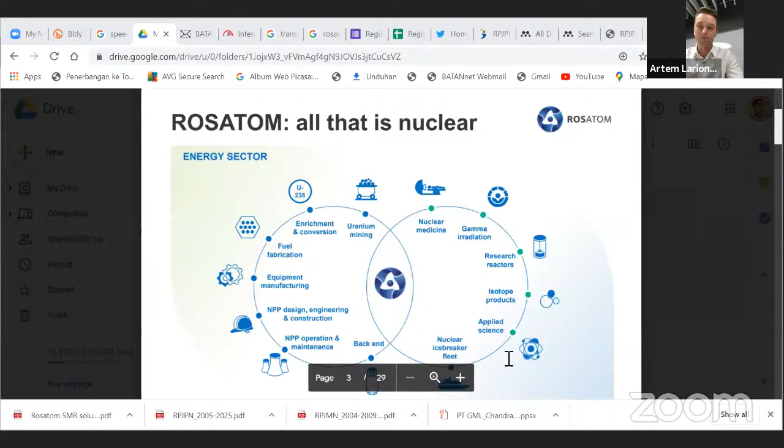Why are SMRs so important to us? On the one hand, the global energy market has changed dramatically over recent years. Smart grids are developing, energy system decentralization is required, and renewable energy sources now make a great impact. We see a trend toward decarbonization globally, and a transition to projects with low capital intensity.

On the other hand, we at Rosatom have great expertise in large-scale NPP construction around the globe - more than 100 Russian-designed NPP units have been constructed globally. What's more, we have wide experience in small reactor technology development for the icebreaker fleet. So we develop our new products, particularly SMRs, as an effective small capacity energy solution to correspond to these new market requirements and needs.

OKBM Afrikantov is a subsidiary of Rosatom and is the chief designer of small reactors for marine applications. Since 1954, OKBM has designed and manufactured over 20 small reactors for civil marine applications, and we have accumulated great expertise in operation of small reactors for the icebreaker fleet, over 400 reactor years.

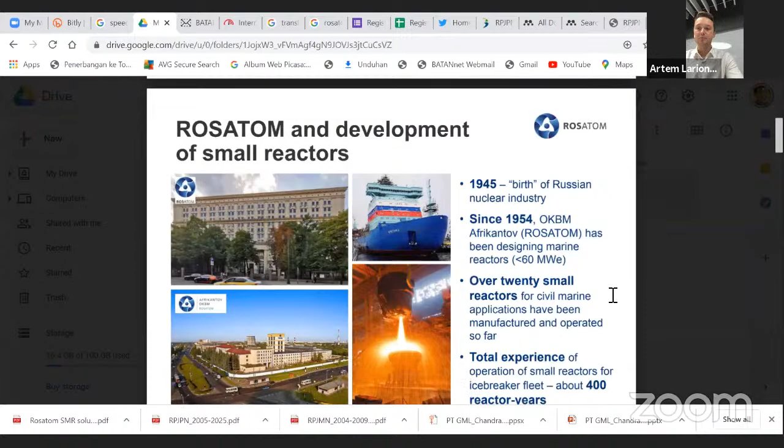We now have 4 nuclear icebreakers and 1 nuclear lighter aboard ship carrier in operation. Rosatom is renewing its icebreaker fleet, and we are developing 2 classes that will be more powerful than the existing ones. These classes will be based on a new generation of SMRs of the Ritm series.

6 Ritm series reactors have been manufactured and installed on universal icebreakers Arktika, Sibir, and Ural. These icebreakers will have variable draught and will be able to navigate both shallow rivers and deep seas in the north. In November 2019, 2 Ritm series SMRs attained criticality, so we can say these reactors are fully referenced. After entering service this year, this icebreaker will become the most powerful icebreaker in the world, able to break through ice up to 3 meters thick.

Icebreakers Sibir and Ural, also with Ritm series SMRs, will enter operation in 2021 and 2022 respectively. 2 more icebreakers of this kind have been contracted.

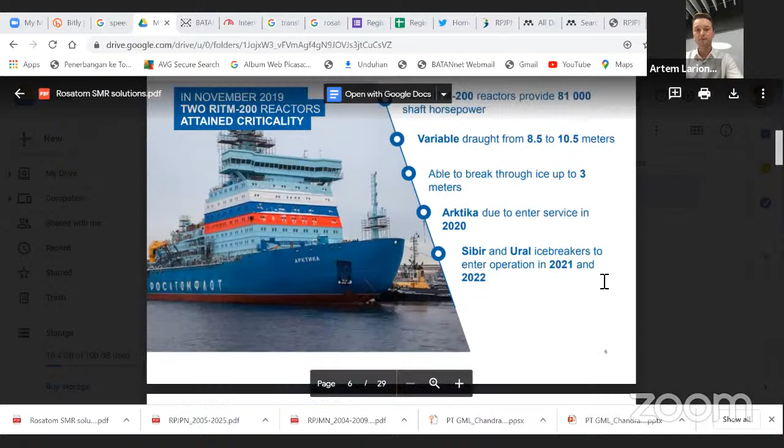Russia pays great attention to the development of the Northern Sea Route, a shorter connection between Europe and Asia, and the Arctic region in general. The amount of time each year that this route is clear of ice and can be passed by ships is increasing due to global warming.

In March 2020, the Russian president signed a strategy document outlining Russia's intentions in the Arctic region for the next 15 years. It includes measures to improve the socio-economic situation in the communities, as well as further promotion of the development of the Northern Sea Route. It is our national priority to reach at least 80 million tons of annual goods traffic by 2024, and 120 million tons by 2030 - we plan to increase it ninefold.

To reach this target, Rosatom is already developing the new generation of icebreakers. They are called Leader, with Ritm-400 reactors, that will ensure year-round navigation by 2030.

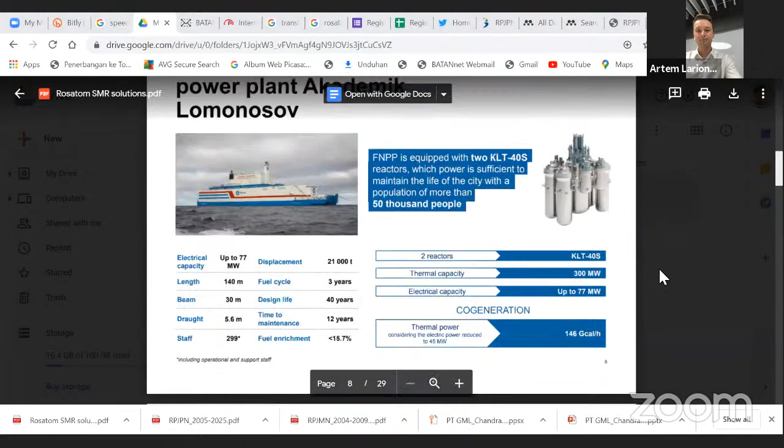Based on that vast experience of design, manufacturing, and operation of small reactors for the icebreaker fleet, we developed the world's only floating nuclear power plant, Akademik Lomonosov, named after the prominent Russian scientist.

It is equipped with two KLT-40S pressurized water reactors that can generate up to 77 megawatts of electricity, or up to 300 megawatts of thermal energy. This may be quite enough to provide a large industrial facility or a small town with a population of more than 50,000 people. These reactors are quite similar to those used on icebreakers, so this is a tested solution, designed by Russian nuclear scientists and naval architects.

Well, the vessel—so I don't see the slide. Okay, this is it. The vessel itself is 140 meters long and 30 meters wide, and has a displacement of 21,000 tons.

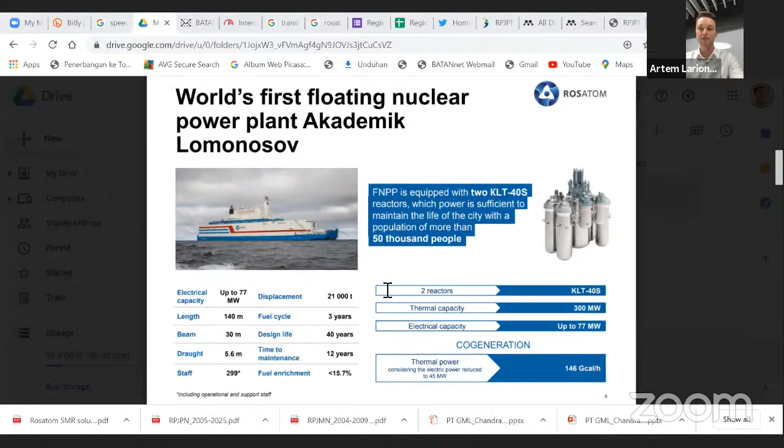One of the biggest challenges for our Russian scientists was the need to maximize the period of permanent work on site without interruptions for fuel reloading and maintenance. The achievement of FNPP Akademik Lomonosov is its own fuel storage on board and refueling system, which allows it, in fact, to reload itself. Due to this, the fuel cycle is extended to 3 years, and the maintenance period is once in a 10 to 12-year time.

After a 10 or 12-year period, it has to be transported to the shipyard and maintained. This procedure lasts for about 1 year. So the total lifetime of the FNPP is 40 years, with possible extension.

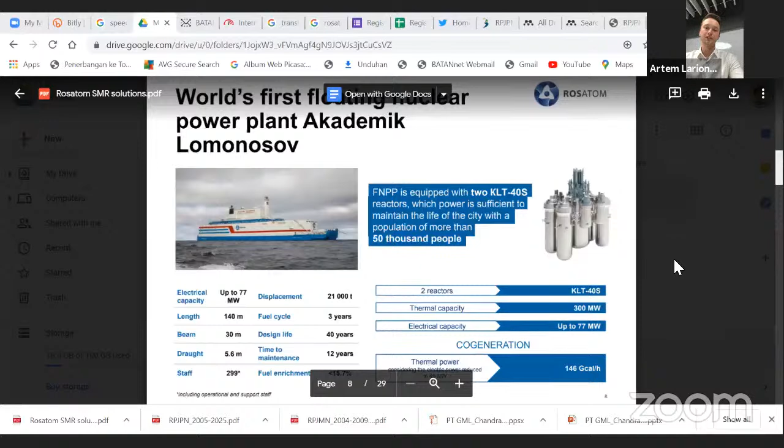Next slide, please. Now a few words about the status of the project.

In April 2019, comprehensive testing of the reactors was finished. In June 2019, the operator of FNPP, Rosenergoatom—a subsidiary of Rosatom that operates all nuclear power plants in Russia—was granted an operation license by Rostechnadzor, our regulator.

In September 2019, the FNPP was successfully transported from Murmansk to Pevek, covering more than 4,700 kilometers. In December 2019, it was connected to the grid and started supplying electricity. In January 2020, it delivered the first 10 million kilowatt-hours of electricity to the Chukotka grid. Finally, in May 2020, it was fully commissioned and started supplying heat to Pevek city.

Next slide, please. Basically, the FNPP consists of the floating power unit itself—the vessel—a special pier, and the coastal sites of the FNPP. Let me start with the coastal site.

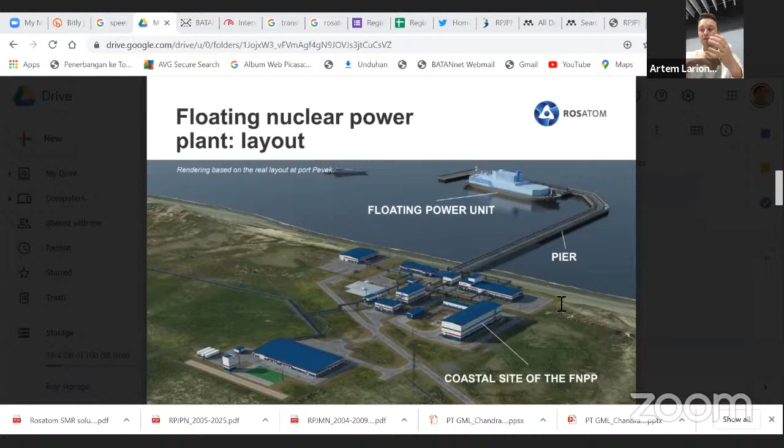The complex of hydraulic structures includes a special pier with devices for unfastening, and an underwater pit that creates the necessary conditions for the operation of the cooling systems. The pier protects the floating power unit from ice drift and waves. Dams and breakwaters have been installed, making colliding with icebergs practically impossible, and the coastal infrastructure prevents any possible impact against the shore or the seafloor. The FNPP is located in a bay that ensures additional protection.

Next slide, please. The floating power unit itself is a non-self-propelled barge, and it has to be towed to the site of operation. It is 140 meters long, 30 meters wide, and has a displacement of 21,000 tons.

The barge is divided into three main parts. The central part is the reactor compartment, housing two KLT-40S reactors, spent nuclear fuel, and solid radioactive waste storage and handling equipment. Above, there are two steam turbines that process thermal energy into electrical power, and in the aft part, respectively, control systems and the compartment unit, as well as the residential unit.

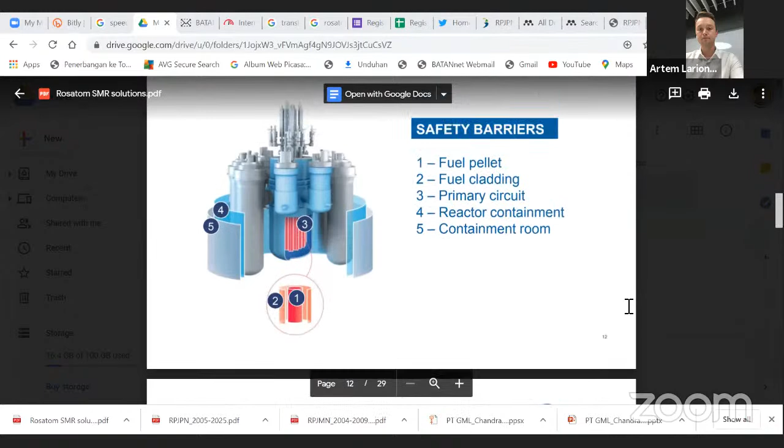Next slide, please. Safety issues were put as an absolute priority for us when designing the floating power plant. All Russian and international safety standards were observed when designing the Akademik Lomonosov FNPP.

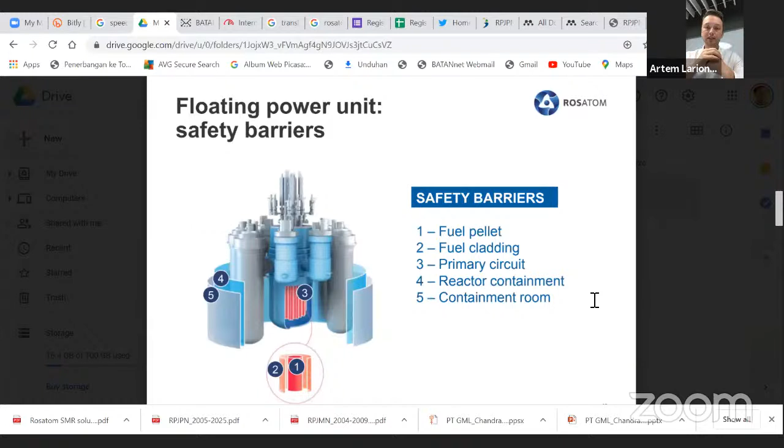The stress tests conducted after the Fukushima accident confirmed the high resistance of the FNPP to severe accidents, including tsunamis, wind loads, and other hazards. Safety is ensured by a combination of active and passive systems, inherent safety features, and the defense-in-depth principle. There are 5 safety barriers, including the fuel pellet, fuel cladding, primary circuit, reactor containment, and containment room—a system of cabins with individual ventilation.

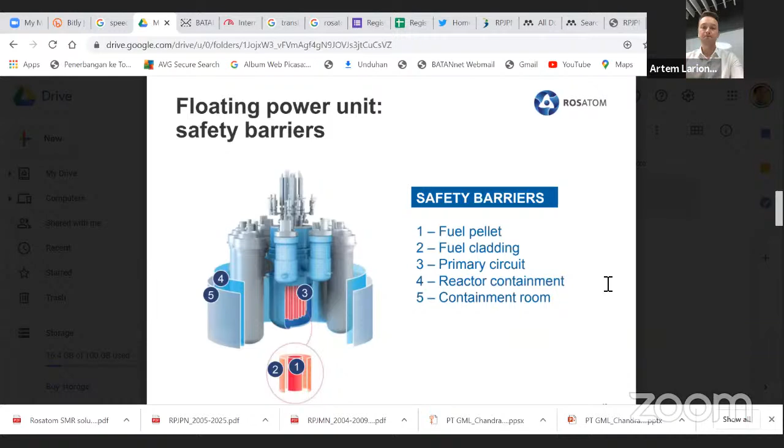The floating power plant has multi-level protection systems from external effects, including a double hull structure. The security system excludes any possibility of terrorist attack or sabotage, either from the sea or from the ground. Next slide, please.

The FNPP staff includes operating personnel and support staff. Overall, there are about 300 people. Operating personnel include 2 rotation shifts that swap every 1 or 1.5 months. Support staff consists of physical security personnel, firefighters, and administrative personnel.

Rosatom provides comfortable working conditions for FNPP personnel. For instance, living and meal expenses, as well as transport costs, are covered by Rosatom. 42 years is the average age of FNPP staff.

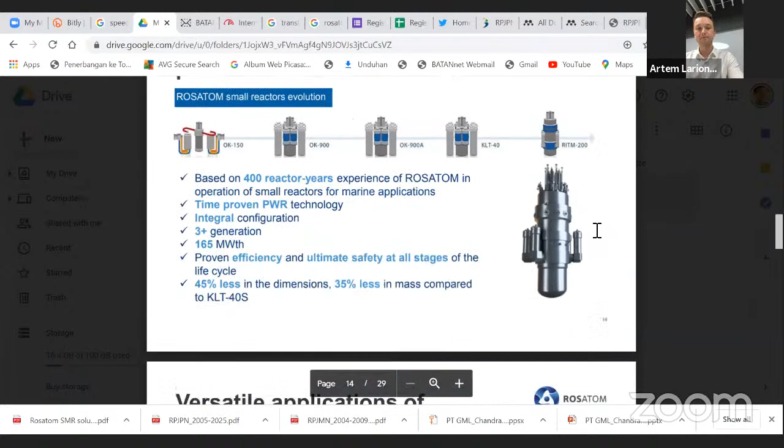Rosatom is now ready to offer its potential customers SMR solutions based on state-of-the-art RITM series SMRs, incorporating all the best features from their predecessors, KLT-40 ship reactors. Our RITM series SMR is based on time-proven pressurized water reactor technology and 400 reactor years of experience in operation of small reactors. The technology has proven its efficiency and ultimate safety throughout all stages of the life cycle.

Innovative features like integral configuration have made it possible to reduce the dimensions of the reactor by 45%, and the mass by 35% compared to the KLT-40S reactor. Such design almost eliminates the classic large-scale loss of coolant accident. 6 RITM series SMRs have already been manufactured, and 2 of them attained criticality in 2019, so we can say that RITM series SMRs are a tested and reference solution.

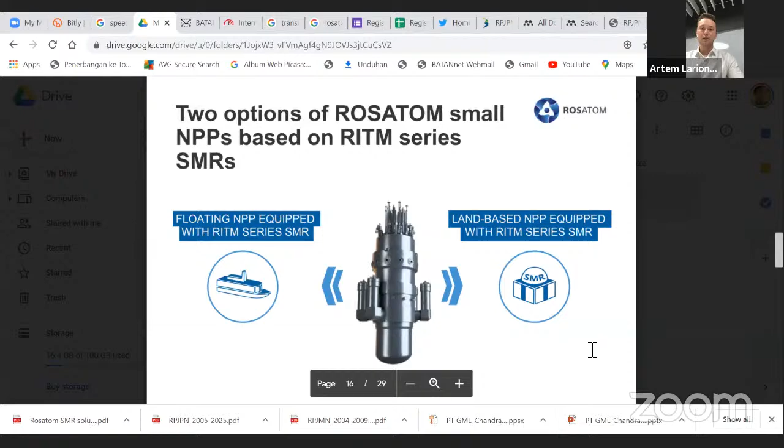FNPPs can be considered for a wide range of potential sites, including islands, archipelagos, offshore facilities, various mining and mineral processing facilities, both in the north and in the south. They could bridge transition times in regions undergoing structural changes, and these power plants could cover short-term energy requirements, for example in large construction projects or offshore drilling. So multi-purpose application is possible.

FNPP can provide electricity, heat, or desalinated water. This is a perfect solution for offshore facilities and a wide range of potential sites as well.

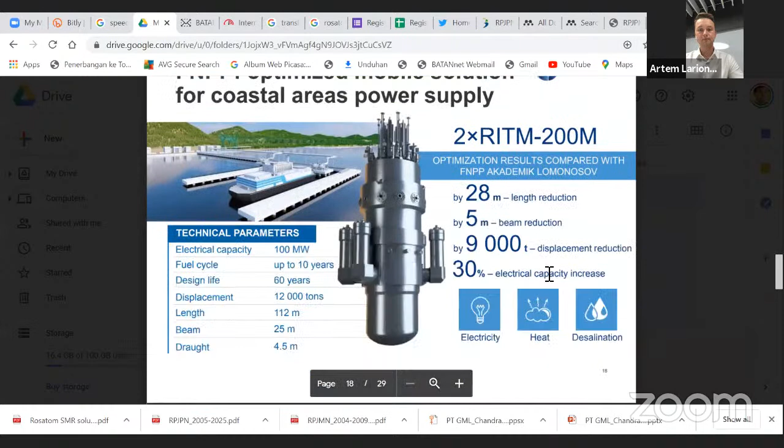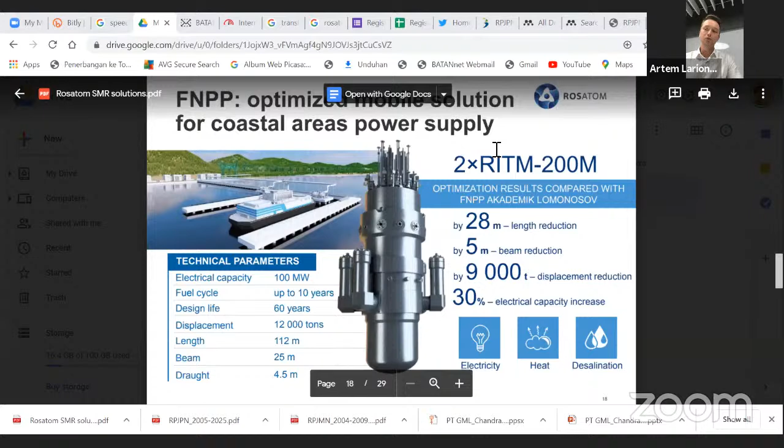Following the success of FNPP Akademik Lomonosov, we are now developing an optimized version of the floating nuclear power plant, based on RITM-200M reactors, each of 50 megawatts. Compared with Akademik Lomonosov, it will be more compact, more powerful, and more efficient. The electrical capacity will be increased from 77 megawatts to 100 megawatts, the fuel cycle from 3 years to 10 years, and the design life from 40 years to 60 years, with possible future extension.

The maintenance period is the same as the fuel cycle, 10 years, so once every 10 years there's a maintenance period and fuel unloading as well. We plan to complete the concept design stage by the end of this year, and the first of a kind of this energy solution is planned for 2027 or 2028.

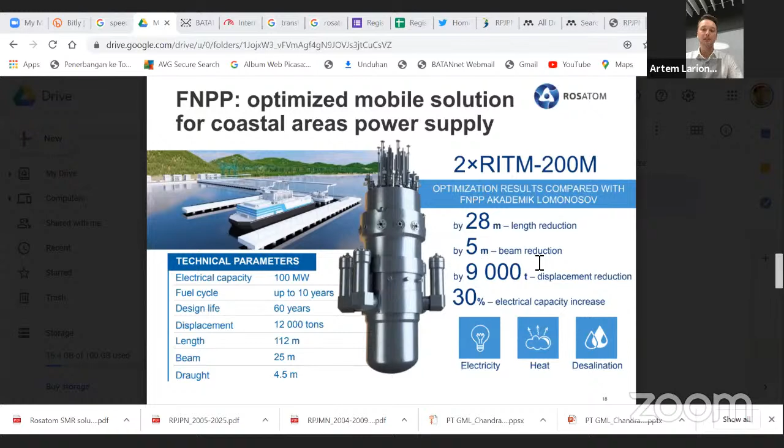FNPPs combine all the traditional advantages of nuclear power, including continuous baseload energy supply, effective cost management, zero CO2 emissions, and multi-purpose application, with something to offer on top of that: a short period of construction works on site, no decommissioning on site, a long fuel campaign up to 10 years, and flexible lifetime period.

What makes FNPPs unique is that they are built from start to finish in shipyards, using the same expert construction technology as on nuclear icebreakers and Navy ships. There can be mass production of FNPPs, and therefore more efficient construction can be achieved than is currently possible with conventional large-scale nuclear power plants.

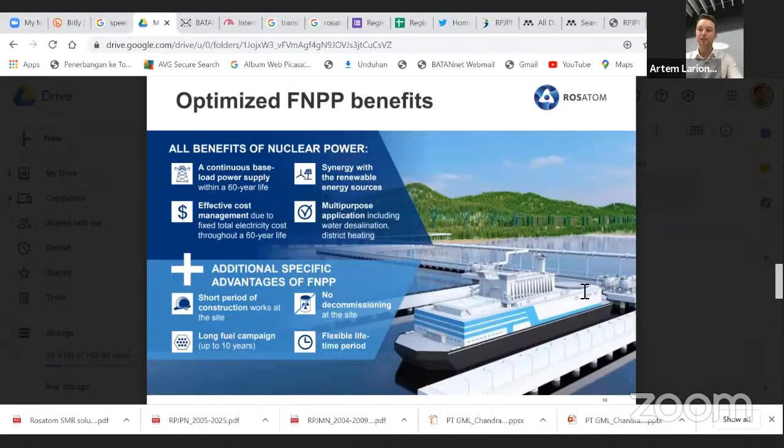In addition to cost savings resulting from the assembly line efficiencies of a shipyard, FNPPs are very, very flexible and can be transported to another site.

Experience of Akademik Lomonosov, as well as all Russian and international safety standards, were considered when designing the FNPP. The safety is ensured by a combination of active and passive systems, inherent safety features, and the defense-in-depth principle. These systems eliminate as many potential risks as possible, reduce the likelihood of accidents, and ensure that if an accident does occur, the consequences are minimal.

The safety of the FNPP against external effects is provided by specific conditions of the site, and the choice of the potential site is very important to ensure natural protection of the FNPP, along with hydraulic structures including a special pier and other features, and of course the design of the vessel and the reactor.

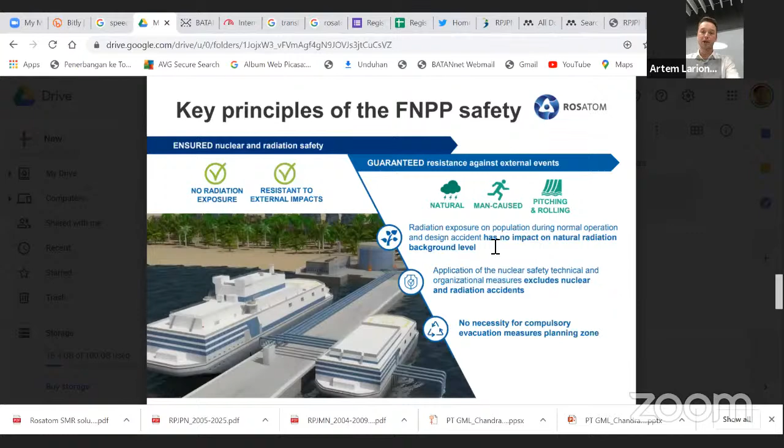Now let me give you more details about our land-based solution.

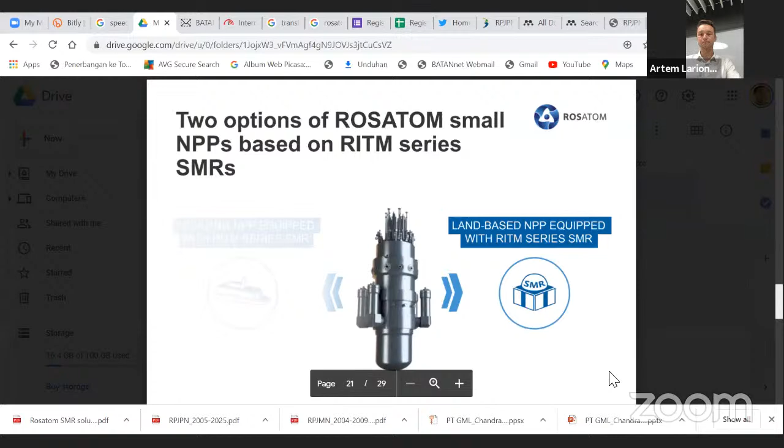So we are developing the land-based SMR and PP as well. It is equipped with RITM 200N reactors with an installed capacity of 106 megawatt. It has a design lifetime of 60 years and refueling cycle is up to 6 years. So the capacity factor will exceed 90% during the whole 60-year design lifetime, making it a really reliable electric generation system. Speaking about the construction time, we plan to reach about 4 years for first of a kind, and we plan to decrease it to 3 years for next generation.

So RITM series reactors can be used for multi-purpose applications, including electric power generation, water desalination, district heating, and due to its relatively small installed capacity and maneuverability characteristics, Rosatom NPP has better compatibility with electrical grid infrastructure.

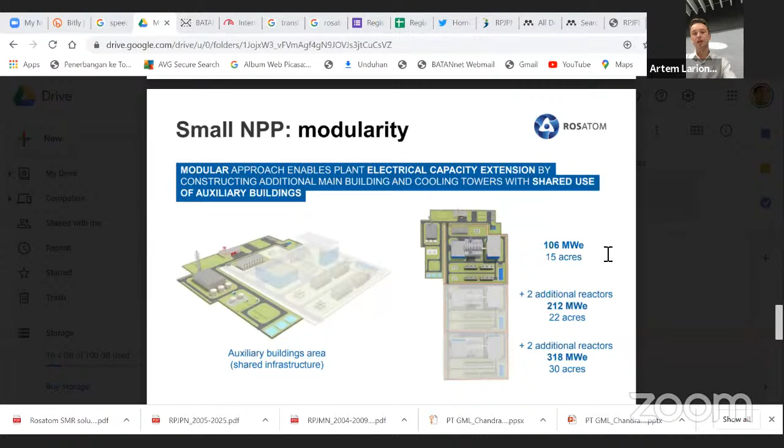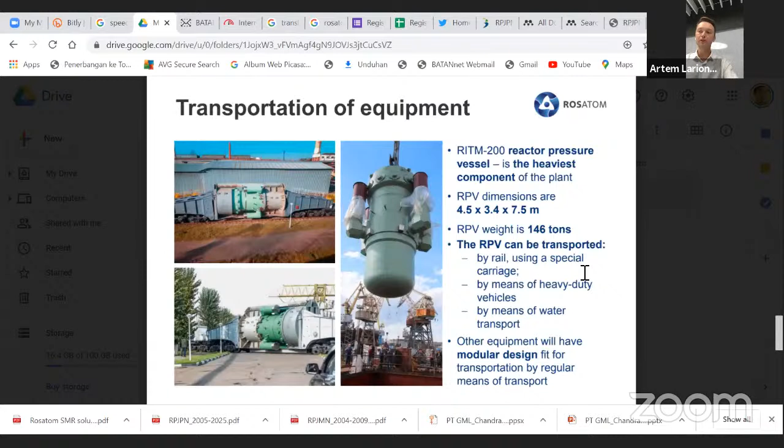Except for civil construction, the whole of the Russian SMR NPP is intended to be modular, making it small, scalable, and factory built. The total weight of assembled RITM SMR is 244 tons. The heaviest component is the reactor vessel with the weight of 146 tons, and the dimensions of 4.5 meters by 3.4 meters and 7.5 meters.

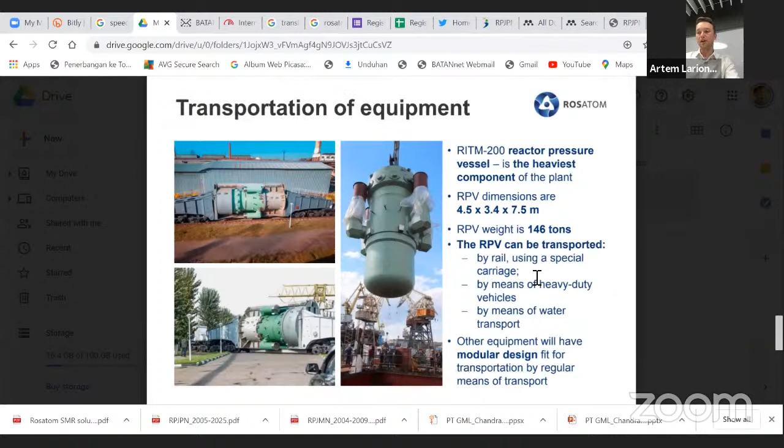The reactor vessel is transported separately in a specially manufactured carriage for railway transportation, and road transportation is also possible with the use of a heavy-duty transport vehicle. So other equipment will have modular design and fit for transportation by usual means of transport. On the slide, you can see a real transportation of RITM series pressure vessel for a nuclear icebreaker by railway.